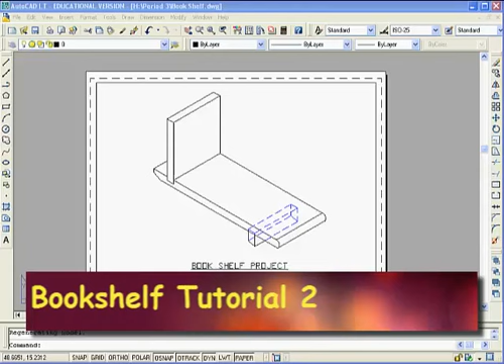Alright, this lesson is a continuation of bookshelf or paper space for bookshelf 1, and in this lesson I'm going to show you how to create additional layouts or paper space sheets for creating the assembly drawing and a detailed drawing as well. I've already finished off the drawing list.

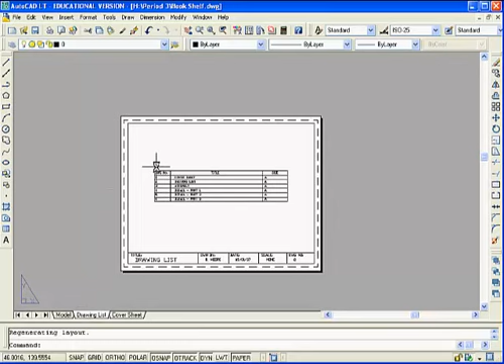Of course, you would go through and make any changes to any of the titles or drawing numbers, anything else that you've got there. But that's really what the drawing list should look like, and it's all been done in Paperspace. So everything here is on the Paperspace layout for drawing list. All I did was use lines and created the chart and make it look nice and neat, make sure that all the text lines up and so on.

But that you should be able to do after having already done the parts list and bill of materials for the other drawings. So carrying on, our next drawing that we need to do is the assembly drawing.

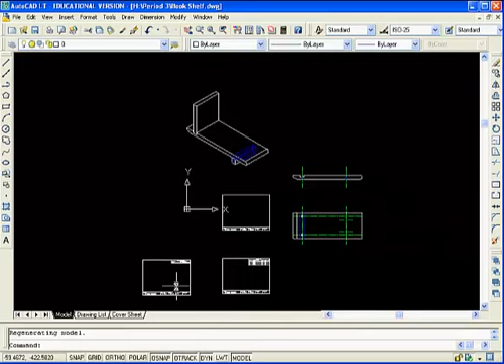Actually here I've added one more border to what I had previously, and in it I've put a bill of materials, so we'll use that when we get to doing a detailed drawing.

Okay, so what we wanted is an assembly drawing, and the same view that we had for the cover sheet would really work very well as an assembly drawing, because we need to be able to show all the parts and how they go together.

So really what we need to do is recreate this drawing with a different border in it so that we can have the parts list, and then we'll add some leaders and change our title block, and very quickly we'll have our assembly drawing.

So to do that, I'm just going to go down to cover sheet, layout, right click, and move or copy, and I'm going to use the cover sheet as my starting point. I'm going to create a copy and say OK.

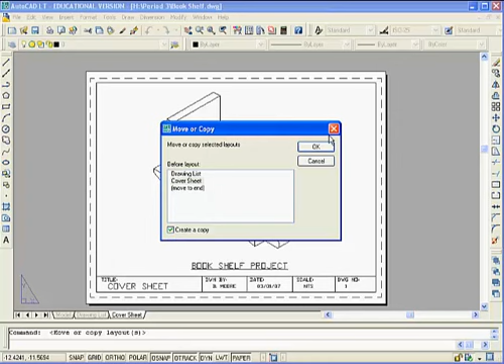So now I've got this one, cover sheet 2. I'm going to right click on it, rename it, and call it assembly. And then say OK. And now in this one we want to change the border, so I'm going to erase this border out of it.

And I don't need the title there anymore. So the view itself we may make some slight changes to, but it's going to be useful to us.

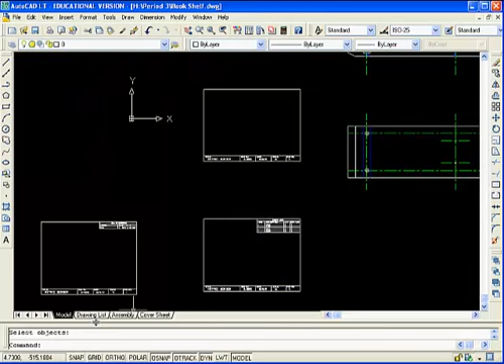So now I'm going to go to the model, and I'm going to take the border that has the parts list in it. So I'm going to edit, copy, enter, and go back to assembly tab.

Somehow I went to the cover sheet and undid my border. So I'm going to undo what I did there. Okay, and everything looks like it's back.

So it's on the assembly that I really want to. Sorry, I want to undo, and everything's back now. Okay, so I'll go to the assembly, and I will erase everything off the assembly, other than the view.

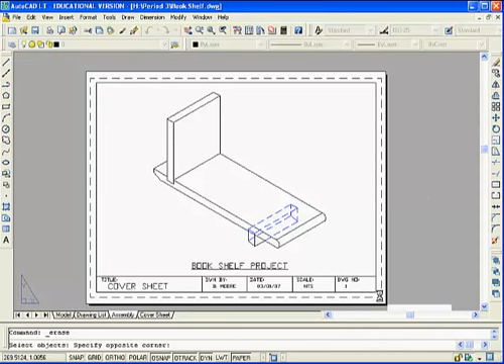And I'm now going to go to the model. I'll have to redo this because I did undo. And copy.

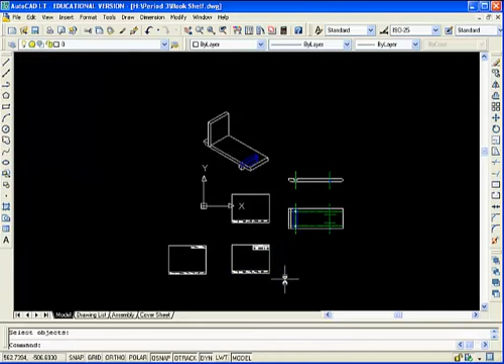Then we go to the assembly file, and I'm on the 0 layer, which is good. I'm going to edit, paste, and put it in.

Line it up so that it's well within the margins and fairly centered within the margins. And so now we've got this thing.

I'm going to change my title to be assembly, and I'm going to change the scale to be NTS, and I'm going to change the drawing number to be 3.

And for some reason this one didn't change for me, so I'm going to change that to NTS. The date you would change and draw it by if you need to.

So I'm just going to turn on the viewport now for a minute, and that'll allow me to work a little bit easier.

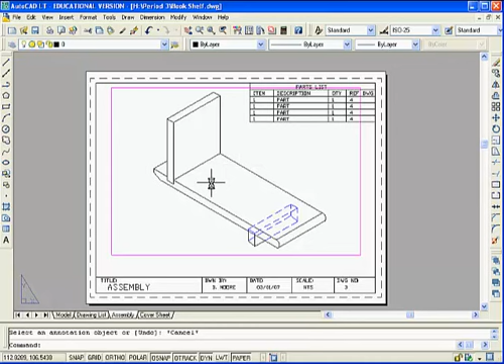I'm going to move this down a little bit just so I can point to the parts a little bit better. So M for move, and click on the viewport itself, and move it down, something like that.

And in fact, I might even move it over a little bit. Change my viewport. It's just not good practice to have a viewport sticking out beyond the printable margin, because it can throw you off sometimes when you go to do your printing.

So I'm going to bring that in, and then I'm going to go back and I'm going to turn off the viewport layer so to see that.

Now what we need to do is to add some leaders. So I'm going to go to Dimension, Leader, and for leaders I'm going to turn off, or I'm going to use my nearest OSNAP position, so I type in near, and just click somewhere on the object itself.

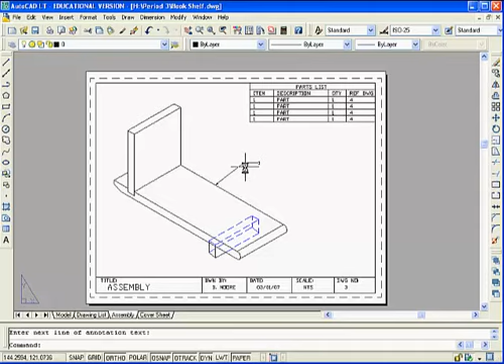Leaders should always go off at an angle to begin with, and then use ortho to make it go straight on the second part. For text width, I want that to be 0, so I just hit enter for the default 0, and then I type in my text, so I'm just going to put in the number 1. And for the next line of text, I don't want another line, so I hit enter, and I've got something like that. Now I'm going to make a circle to put around it.

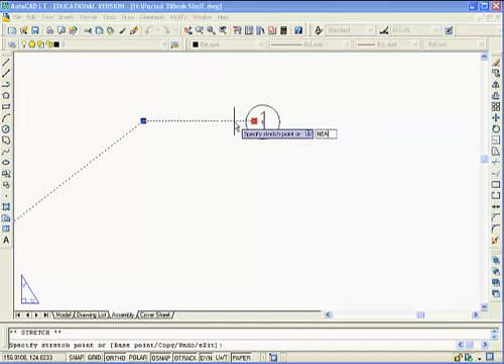Something like that. I'm going to move the text inside over a little bit, and I'm going to take this grip and put it near, so I type in near to, and just click on its own line here somewhere, about like that.

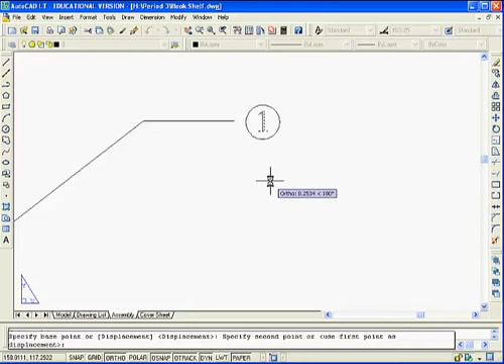So we've got a little bit of a gap between the circle and the leader line. This number 1 doesn't look quite centered here, so I'm just going to try to get it a little bit more centered, something like that. That looks better, and now if I zoom out, it looks pretty good.

So I'm going to use that circle and the number for each of the other items that I'm going to number in here. We're going to have 3 parts, so part number 1 would be the base, part number 2 would be the back, so I'm going to put in another leader.

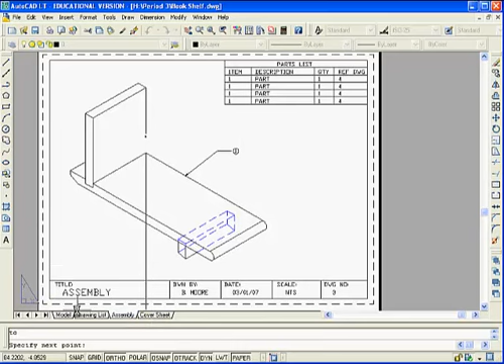Again, I'm going to type in near. And then I want to go and turn off ortho, so that I've got an angled section and then a straight section.

This time I don't want to put any text, so I just hit enter and then say OK up here. And then one more leader, dimension leader.

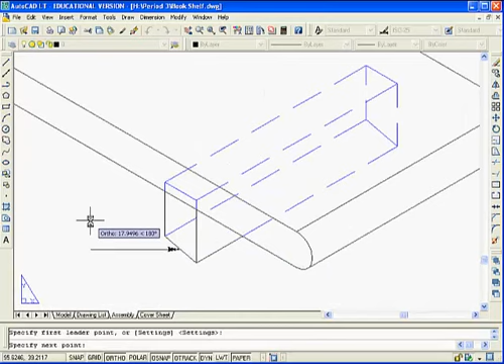I'm going to put that one in down here, and again I want it to go at an angle, something like that. And then a straight section, and enter until I'm through, and say OK.

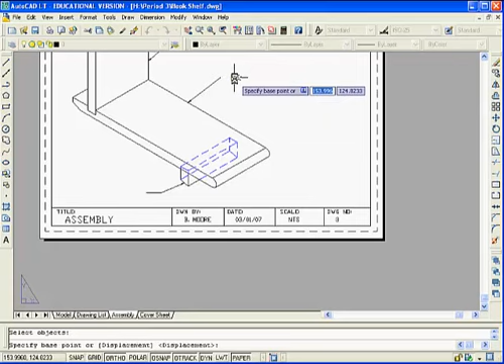And then what I'm going to do is copy the circle and the number, and I'm going to copy it from that endpoint through to there.

For the next one, I'm going to turn off ortho, and I'm just going to put this one in by eye since it doesn't work the same way around. I'm going to turn off OSNAP as well, just at this moment, so I can avoid it going to the endpoint.

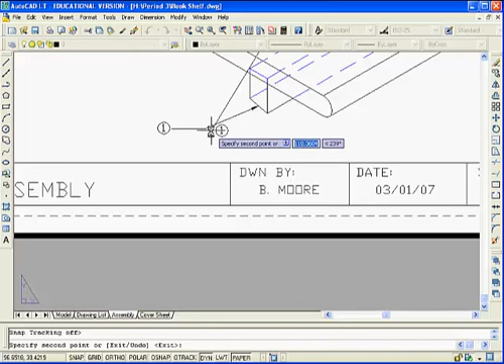Something like that. And then what I've got to do is go back and change those numbers. So this should be number 1, this one I'm going to make part number 2, and I'll go down and do the third one. That should be part number 3.

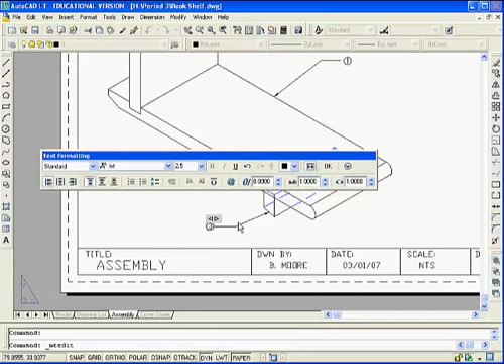Zoom up. And now what I've got to do is make my parts list agree. So item number 1 is going to be, we'll call it the base. There's a quantity of 1, so that's okay.

And the reference drawing for the base is going to likely be drawing number 4, right, because it's the next detailed drawing. If I decided to do differently, then I would need to change that reference drawing.

So item number 2 is going to be the back, and there's a quantity of 1, and its reference drawing is probably going to be drawing number 5. I can always go and change that later if I decide to do differently.

And item number 3 is going to be the leg, and there's a quantity of 1, and it'll likely be on drawing number 4 - or sorry, number 6.

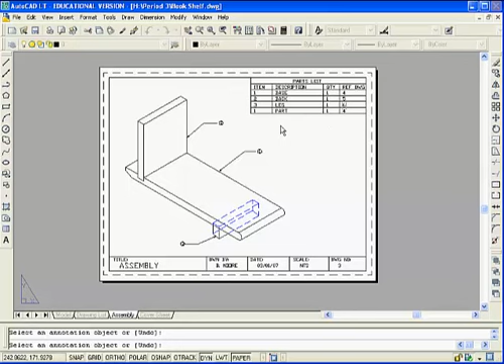Okay, and then I'm going to escape to get out of that. Then I'm going to erase the bottom line - I don't need that row in there at all. So I'm going to take all those ones and delete them out and just shorten up these lines. I'm going to put OSNAP back on again so I can be accurate.

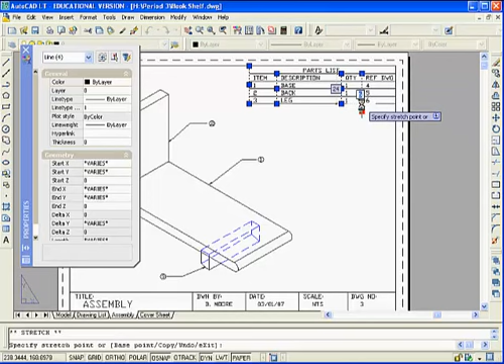Now we've got a good looking drawing. It's got a good view, shows how the components work together, shows their identification, and we've got the parts list. So we've now completed that part.

The last thing that I'm going to show you at this stage is how to create a detailed drawing. I think I'll do that in a separate lesson so that this one doesn't get too long, so you can look to part 3 for how to do a detailed drawing. There's a few new things in there.